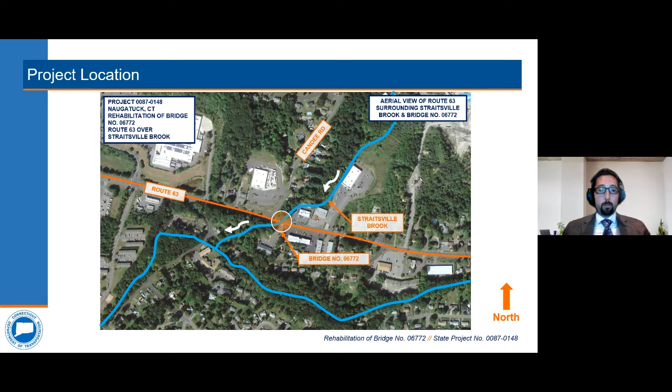As we zoom in a little in this next image, you can see bridge 6772 just east of the roadway intersection between Route 63 and Candee Road. The bridge is perpendicular with the roadway, which has the brook making a 90-degree turn at the inlet and a larger obtuse angle turn at the outlet.

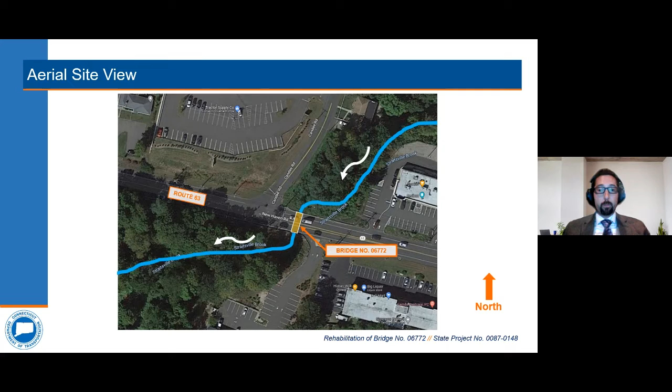The existing structure is an asphalt-coated corrugated metal pipe culvert built in 1966 during the Route 63 widening project. The culvert carries 2 lanes of traffic from Route 63 over Straitsville Brook. The culvert is structurally inadequate and hydraulically adequate. Please note, despite being structurally inadequate, the bridge is perfectly safe for vehicular travel.

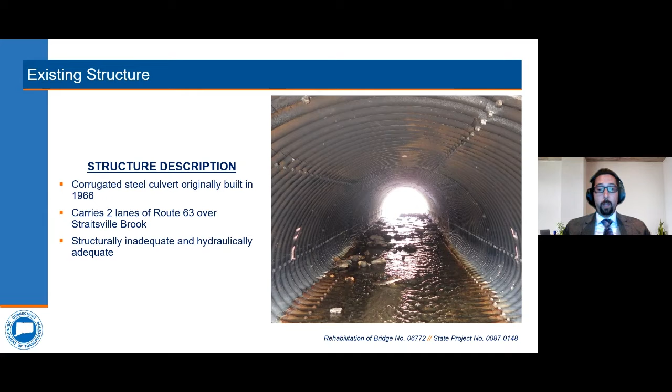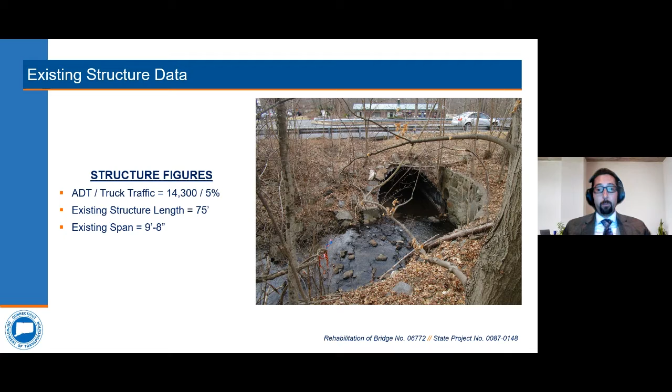The culvert has an average daily traffic, or ADT, total of 14,300 vehicles, with a truck traffic percentage of 5%. As noted before, the culvert is perpendicular to the roadway, totaling 75 feet in length, and has a span of 9 feet 8 inches.

The retaining wall at the inlet rates as a 5, fair. The cutoff wall at the outlet, which is the concrete wall beneath the pipe, rates as a 5, fair. And the scour, which is the term for pockets within the stream bed that occur from material washing out from the flow of the stream and can expose structure elements which could compromise the integrity of the structure, rates as a 6, satisfactory.

The culvert has the following deficiencies: a 12-inch by 8-inch by 3-inch dent along the top near the inlet, most likely from a metal guide rail post being driven too far.

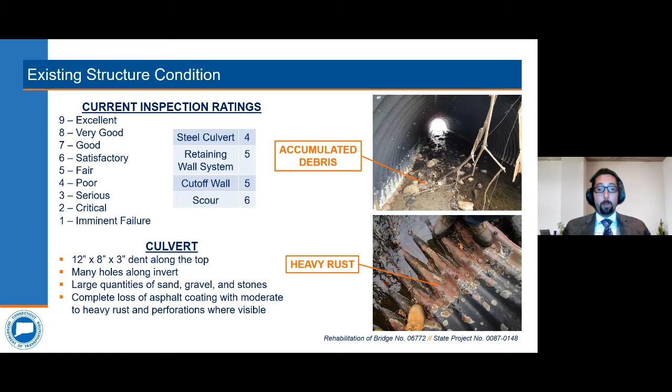For scour, there is a scour hole present at the west side of the inlet pipe. There is also a channel drop-off at the end of the outlet to the rocks below.

The goals of this project are the following: to address deficiencies of bridge number 6772, to minimize the disturbance to Route 63 travel, to complete construction in a timely manner, and to effectively use funds.

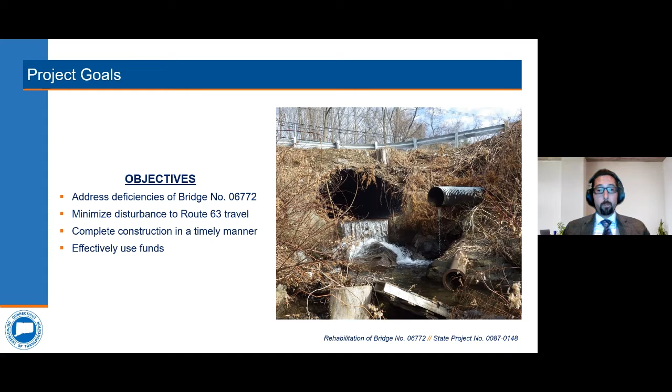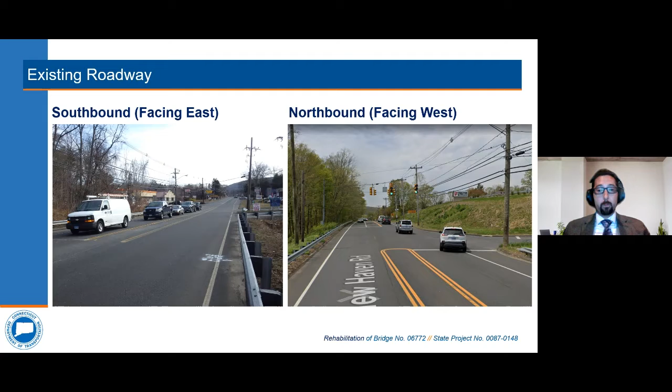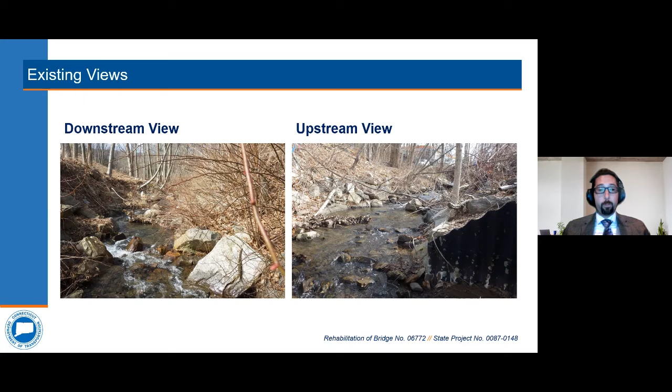The use of the access road will minimize traffic impacts along Route 63. Although traffic impacts along Route 63 are anticipated to include shoulder closures and possible lane closures, through lanes will be provided for eastbound and westbound traffic throughout the project during peak commuting hours.

Through lanes will be provided for eastbound and westbound traffic throughout the project during peak commuting hours. During off-peak hours, alternating one-way traffic should be anticipated at various times.

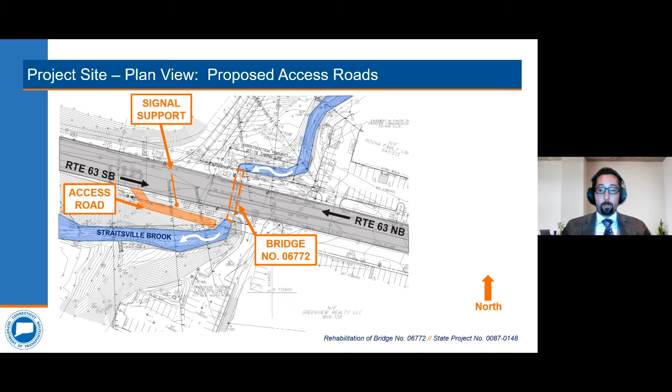Short-term utility outage may occur during relocation activities. Any relocated overhead utilities will be restored to a similar original condition along Route 63 following the completion of construction activities.

Tree removal and tree trimming will be required to accommodate both the construction of the access road and the overhead utility work. The details of the restoration of areas impacted by tree removal are not known at this time, but revegetation of those areas will occur.

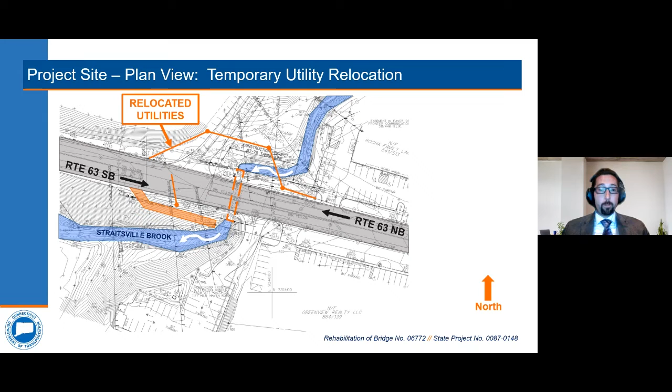To address all of the noted project goals, we are proposing to reline the existing culvert with a pipe arch. Relining is installing a new pipe inside the existing opening and filling the area between the two pipes with grout. The new pipe is structurally independent from the existing pipe and will carry all loads from the roadway above.

In addition, 4 new wing walls will be installed, one on each side of the inlet and outlet.

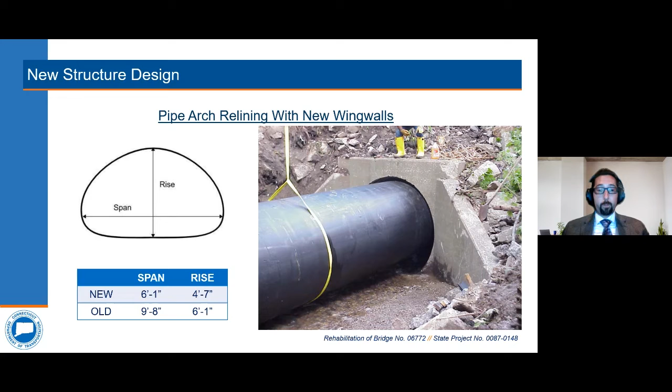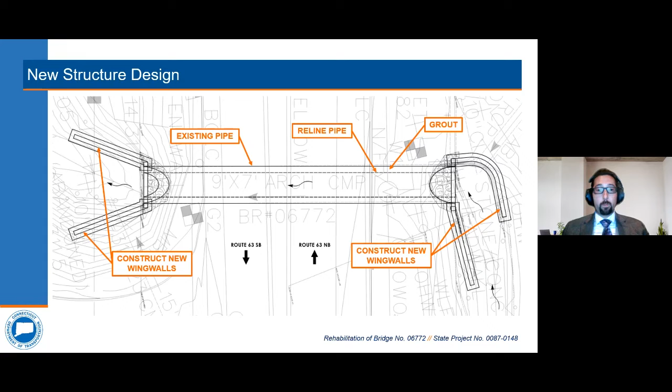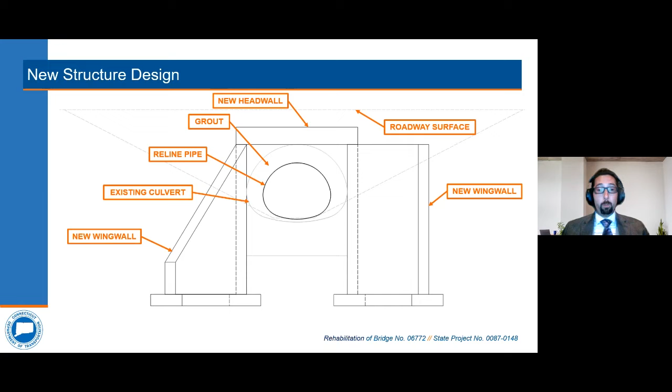There are no state or federal listed species present in the project area.

Our anticipated permits include the Department of Energy and Environmental Protection pre-construction notification under General Permit 19, Form L; the United States Army Corps of Engineers pre-construction notification under General Permit 19; and the Department of Energy and Environmental Protection individual inland, wetlands, and watercourse Form L.

Please note, access to all local shops and businesses will be maintained and remain fully open throughout the duration of the project.

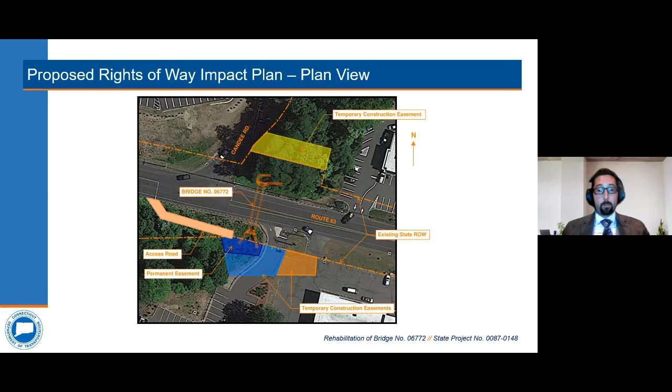Thank you, Stephen. My name is Matthew Giannakopoulos. I am a right-of-way coordinator with the Department's Division of Rights-of-Way. It is our office's responsibility to acquire the property rights needed for transportation projects. As Stephen just outlined, the proposed project design would require the acquisition of a few easements or property rights from some of the properties in the vicinity of the bridge.

So I'm here tonight to give a brief overview of our right-of-way acquisition process. Keep in mind, though, that the exact limits of any property rights needed are still being worked out and may change a bit from what you saw as the design moves forward.

Any property rights that end up being required will be acquired in accordance with the Connecticut General Statutes sections 13A-73 and 13A-98E. And whenever there is federal money used in any phase of the project, the department must adhere to what is known as the Uniform Act.

At that point, we determine the fair market value of those property rights, and we use that value to establish an offer of just compensation. That offer is then sent out to the property owner in writing, and then a negotiator from our office is available to meet with the impacted property owners.

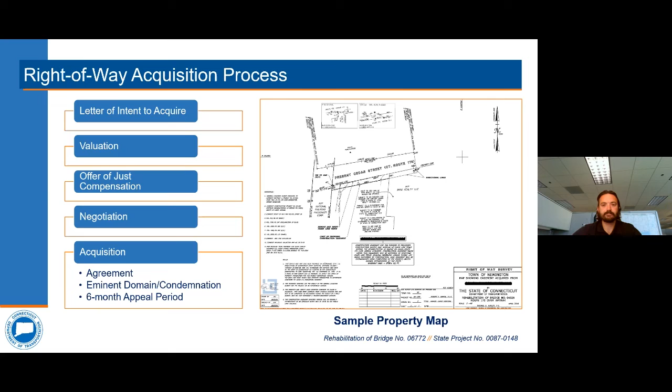Thank you, Matt. The project is currently on schedule to start construction in the summer of 2024. The total project cost is approximately $1.5 million. No town funds are required for this project. It will be funded with 80% federal and 20% state funds, and the project will last one construction season.